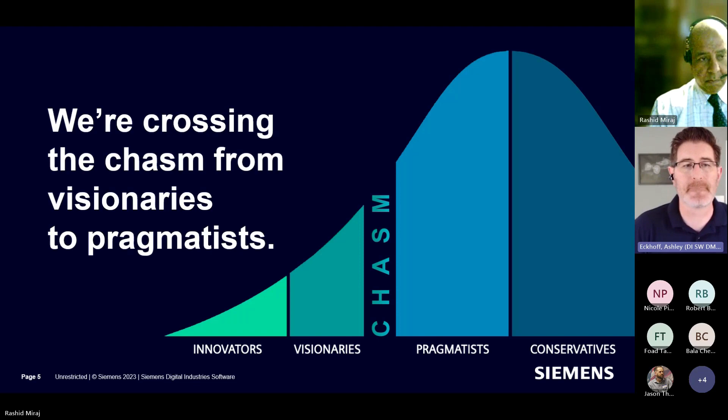So Siemens has worked hard to put together a comprehensive additive manufacturing approach that allows customers to address their challenges in both the virtual and physical worlds, from product design to production and even beyond, in very pragmatic ways. Just to review Siemens, Siemens has a ton of software solutions covering all the major acronyms: the EDA, the MOM, the MES, the PLM, the CAD, the CAM, the simulation. All of these products are basically concerned with taking an idea from the virtual world into the physical world in one way or another. And our additive manufacturing products are no different.

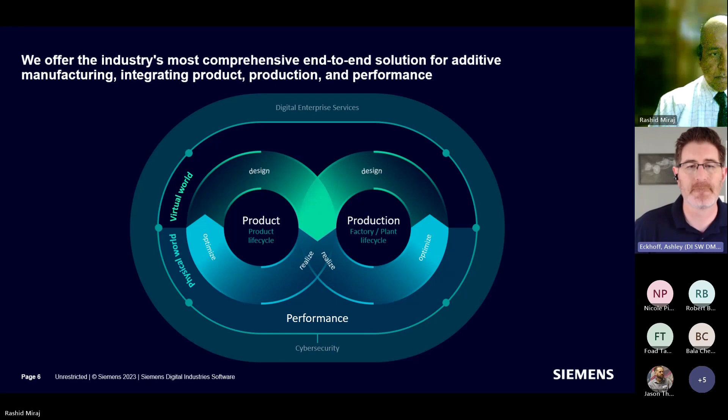So we do this through a seamless digital thread from the initial conception of a product and a design to the delivery of that part to the field. Now, this seamless digital thread allows for a tight, managed, traceable production workflow that then feeds into quality output in the physical world. Siemens has products across our portfolio that aid in this sort of order to production process.

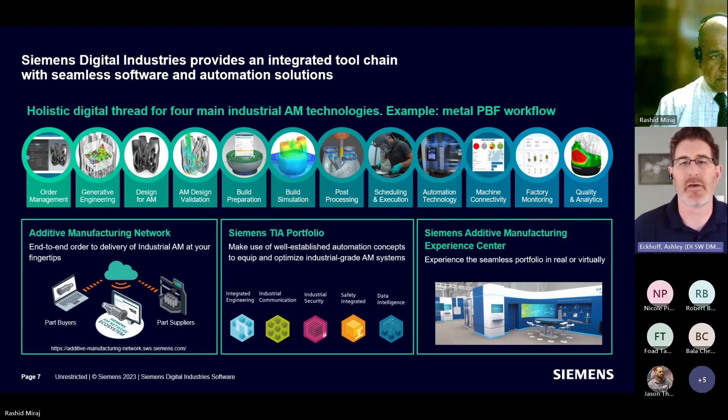If we look at this workflow in a bit more detail, you can see what we mean by seamlessly integrated across this value chain. Here you see the process for a part made with metal powder bed fusion, but the process is similar for other technologies as well.

Now, the beauty of this type of end-to-end solution is that there's no data translation, and the prerequisite sort of data cleanup between each step in the process kind of goes away. Furthermore, the entire process can be documented and traced every step along the way, and you can even begin to realize some other efficiencies from your product data moving smoothly between these steps.

So, for example, if your initial design goes through a design change or a revision that changes the geometry, that geometry can flow through the process down to other steps like build tray setup, where support structures can be automatically updated and regenerated as well.

So what you see here is only a subsection of the steps often necessary, but we try to offer our customers capabilities that are part of a holistic solution. We want our customers to be able to keep track of their versions of parts, the materials used, the tools required, the machines that are involved, and where that part is in their process from design to print.

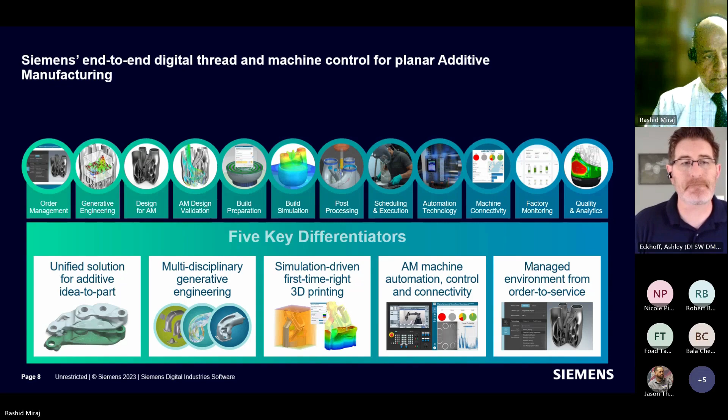Next slide, please. So I don't want to steal any fire from Dr. Miraj here at AlphaSTAR, but their solution for build simulation slots nicely into our end-to-end additive manufacturing workflow, allowing for our common customers to utilize their solution for polymer build simulation from within the Siemens solution set. This means that the data created for additive manufacturing process remains tightly managed, and you don't have some of those issues that we talked about from those various different point solutions throughout the process chain.

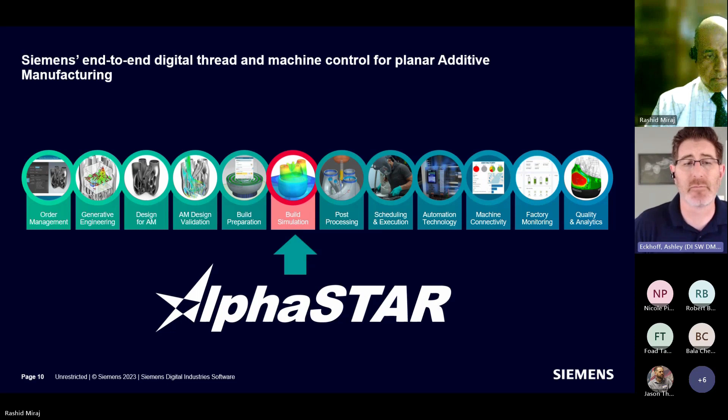Next slide, please. So at Siemens, the goal is to industrialize additive manufacturing for this new wave of pragmatic companies adopting the technology. We believe that getting the most from AM requires a complete end-to-end additive solution with design, simulation, production, data management, and process management software, all working in concert to enable that AM workflow.

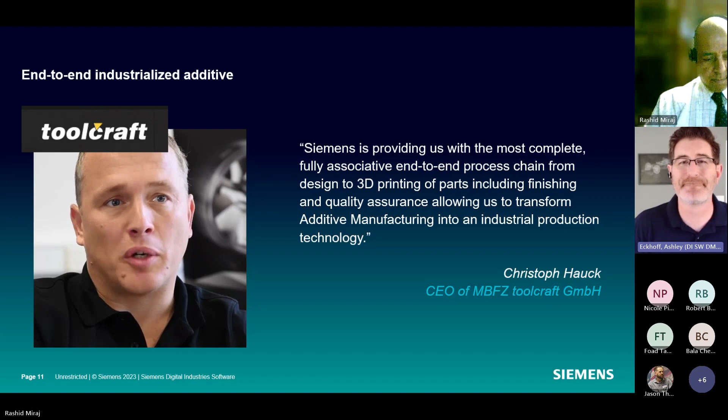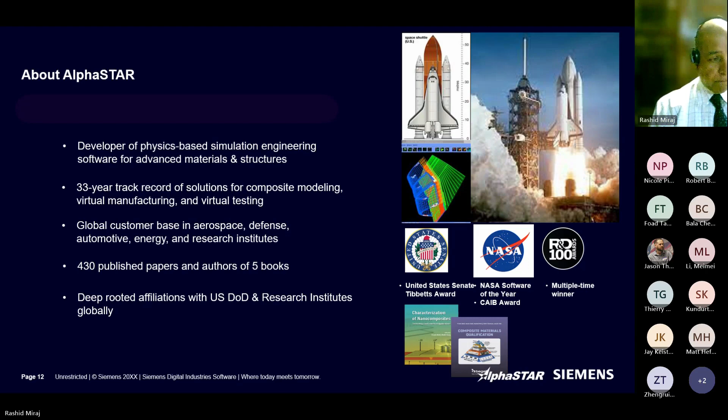We're grateful to be a part of the Siemens universe and carrying forward with that Marvel analogy, the powers of Siemens and AlphaSTAR are coming together for this particular opportunity. We understand that end-to-end solutions, the digital thread that really brings strength to the Siemens product line, is something we can take advantage of.

We recognize their solution, the power of the Simcenter 3D environment, and all of the tools that come along with that: the ability to develop exact meshing, slicing capabilities, and a solver that addresses both nonlinear thermal and nonlinear mechanical finite element analysis. Although the discussion today is on polymers, we know our friends at Siemens are also competent in the area of metal powder analysis, and hopefully we can grow into that direction with them in the future.

So what does AlphaSTAR bring to the table? Our expertise in multi-material, multi-scale modeling, deep physics on a multi-scale level to really understand mechanical properties, the defects and the effects of defects, both on the fabrication processing side and the as-built structure performance side. We've explored this space over the years in terms of AM as related to multiple 3D printing technologies: large format AM, big area additive manufacturing, FDM technology, SLS technology, and the plethora of acronyms that are out there.

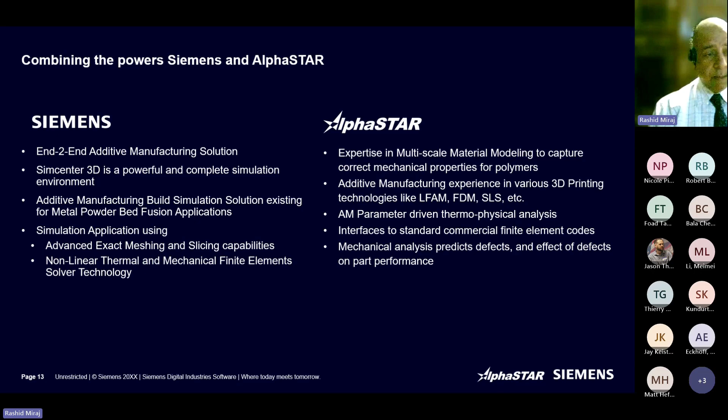While we're talking about, say, the NX Nastran platform of Siemens, in case there are other flavors of solvers, we have the ability to match up with those solvers as well. We predict not only defects and manufacturing anomalies that arise during a build, but also the effect of those defects on fabrication and on part performance. That's what we can bring to the table, feed back to our friends at Siemens, and make it part of that full end-to-end, from design to service capabilities that Siemens offers to its customer base.

And addressing interlayer delamination, whether from bead rotation or other causes, wrinkling, warpage, anisotropic behavior, residual stress, saturation, mechanical properties, fiber waviness, and agglomeration. Again, these can either be challenges we recognize or inputs, values put into the system to predict certain phenomena that may arise, as much information as possible, maximum data set, to really understand what's happening.

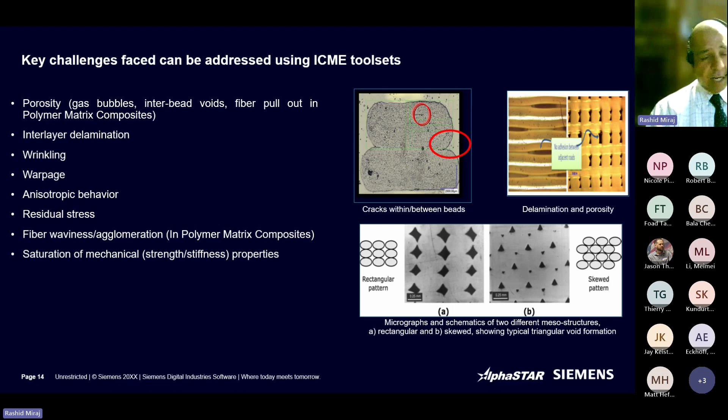In the AM process, looking at our role in the robust Siemens platform end-to-end digital thread capabilities, we take advantage of what Siemens can offer: detailed importing of CAD models, developing CAD models, creating structural meshes for that understanding, workflow, build plans, and the setup, whether it's the build tray, bottom plates, or tool paths. All of that information that is part of that build problem, build plan, we take on board and start using what we call our material modeling approach.

In the case of polymers, understanding the behavior of polymer systems at elevated temperatures, whether using short fibers, long fibers, continuous fibers, and other elements that come into play, how they impact the overall material system and material behavior. These are knowledge sets that we work with and analyze. And then what is the thermophysics of this? This might be considered just temperature distribution, when you have the build plan and you know what's going on, you have the G-code.

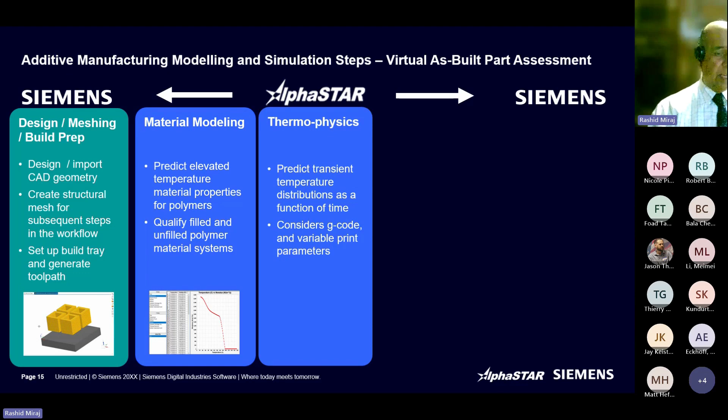In the case of a deposition process, you have a hot layer dropped on top of a cooler layer. There's a dynamic effect taking place, a transient dynamic effect. How is that? What is the temperature distribution? What are the gradients involved? How would that actually impact a build? And then also at the macro level, I know our friends at Siemens look at that as well, but here's a second set of eyes to look at the tool path and layout configurations and how that might impact not only a build, but the final net shape and quality of the built part.

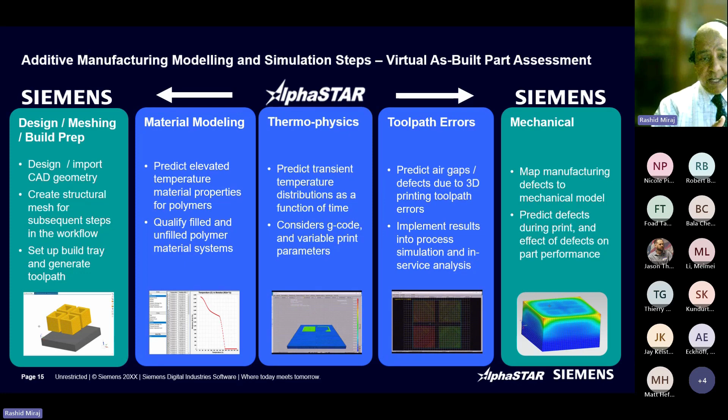All of this information, both data and analysis, is fed or mapped into a mesh and then goes back to the Siemens engine as a value add to finite element analysis, to make predictions of defects, anomalies, and their effects, whether it's final build quality, distortion, or shrinkage, as well as taking that virtual as-built part and subjecting it to in-service loading, in-service environments, and assessing part performance. It can be simply static loads, dynamic loads, fatigue, creep. The possibilities are there.

So let's look at these sections in a little bit more detail. I talked about micromechanics-based material modeling for polymers and composites, understanding what happens at room temperature and what happens at elevated temperatures. Depending on your parameter settings, are all the powders melting? Are they not melting? Depending on your process, are they coming out of the chamber in the state that you want?

Incorporating things such as cure kinetics to understand behavior, say in this case modulus, even beyond the glass transition temperature. Here we have an example of test data which kind of peters out right at the TG, but there is still some level of stiffness that can be predicted and captured. So again, how does that impact your build? How does that impact thermal distribution and the up and down temperature gradients? Understanding that gives us a full understanding of what's happening in the build cycle.

That also extends to elevated strengths, again using multi-factor techniques. We've had success undertaking this analysis and validating it against multiple common popular polymer material systems, whether it's Ultem 9085, 1010, PLA, ABS, or the nylons. The list is growing, and we're always expanding that data set. It's fully validated and available to the end user to incorporate into their design, having confidence that the predictions they're making are based on real validated tests.

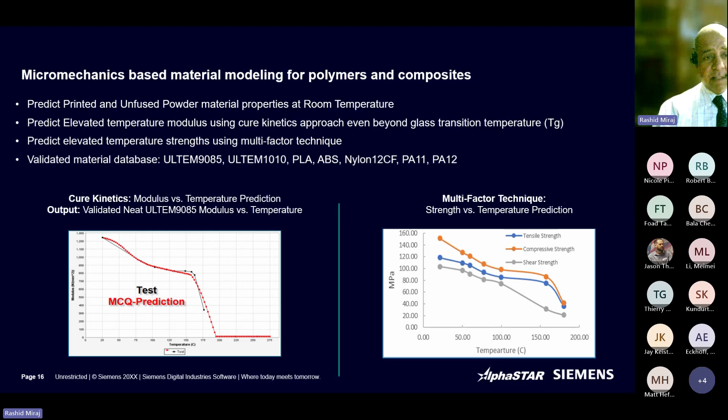Again, we talked about the other step: thermal distribution. Guided by machine parameters and build strategy, tool path and print parameter inputs, what's happening, what is the temperature distribution, whether for the entire build volume, incorporating the build plate and support structures, understanding transient temperature history, the hot and cold regions and cooling rates. All of that information ensures maximum resolution, not necessarily in finite element size, but in terms of what information is incorporated. So the power and speed settings, layer thickness, chamber temperature, dwell times, extrusions, bead width, laser spot size—whatever important variables there are is captured as much as possible to incorporate into the full understanding.

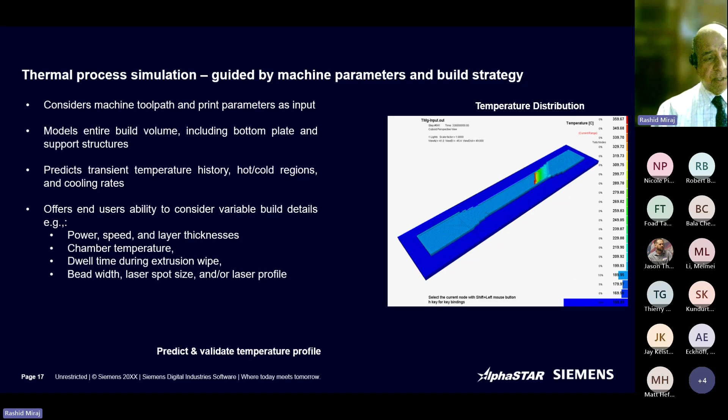So as I mentioned, with those three internal steps we have the big picture of the problem, so that when we send it to our friends at Siemens for the finite element solver, it's making the most exact calculations possible because we have a full picture of what's been going on. Also the macro-voids for toolpath quality, where those little gaps might come from the placement of the tool—you can see even here, little minor things that come up, but what's the impact of that? Is it going to distort the part, is it going to impact performance? That information is captured, remembered, and incorporated into the analysis.

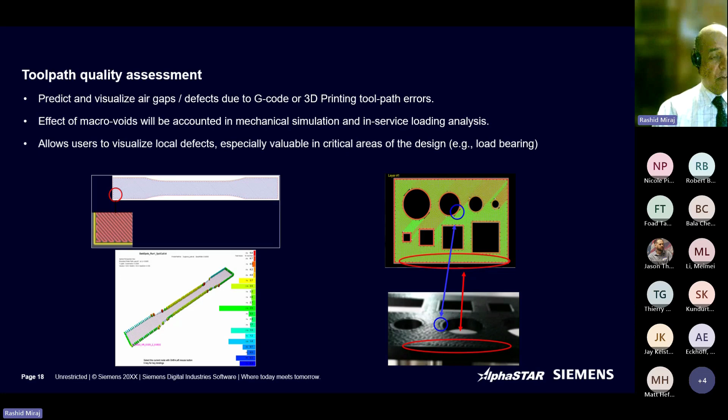So that when you go back to maintain or take full advantage of this end-to-end digital thread, you now have a way to identify the problem, virtually go back, tweak it, fix it, go through it again—bingo, now we've got a qualified part. Now we're on the right track without spending time on multiple builds. As they emphasized at Siemens, the key differentiator was build simulation for first-time-right fabrication. That's our role, that's our contribution to that overall Siemens approach.

And so the next step is that package is sent for thermomechanical analysis, thermal structural analysis, so we can see how we impacted the actual build itself, the layer-by-layer construction, what distortions are coming, predicting the defects that may arise, and predicting the effects of removing the base plate. All of those things come into the analysis so that we have a very detailed understanding of build quality and parameter-driven effects.

So now you may approach or pursue optimization methodology to say, what's the right combination of parameter settings, what's the right combination of material settings to get the build quality you want. And that is net shape, incorporating any problems that may arise, distortion, shrinkage as well.

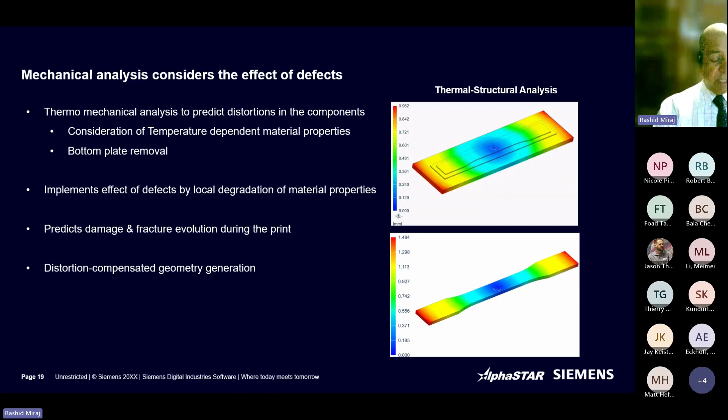Here you go. The idea of as-built part subjected to in-service loading, again, working with our Siemens partners to make those predictions on behavior. Is the part performing the way it was originally designed? Is it meeting spec? And it's because we've done all that work together to get you to the point that you can say, not only is it aesthetically correct, not only is it geometrically correct, it is performing the way we want it to.

Again, print it right the first time, and more importantly, print it right the first time so it works, and you don't have to do this all over again. Save time, save money, get to deliver the part in the most efficient and productive manner possible.

So we're doing full virtual predictions of build part performance, and this allows you—think about this for the engineer that's into trade studies, parametric studies—explore your material systems, explore your parameter settings, go crazy, everything done virtually. Allow yourself to look at all the possible variations. And again, you're accomplishing this virtually, so you're saving time, saving money.

Think about what this would have been if it had been all an experimental program. And have confidence that everything is an incremental approach. We validate constantly, and we would hope our end users would do that as well. Start with a simple specimen, dog bone, predict, validate, next step part, experimental test, validate, until you get to the point where you have that confidence and knowledge that the tool set is delivering analysis that gives you confidence in your designs.

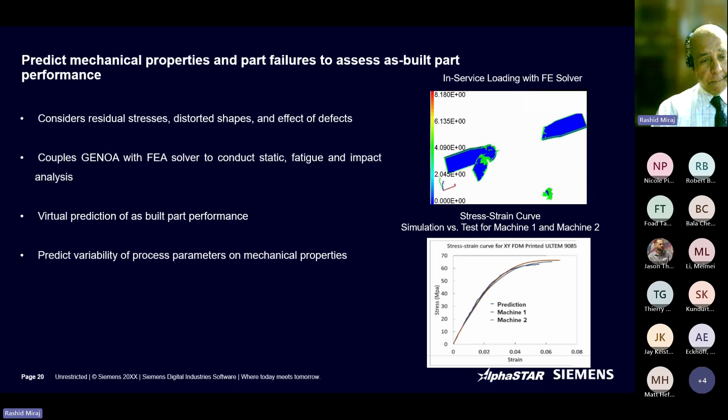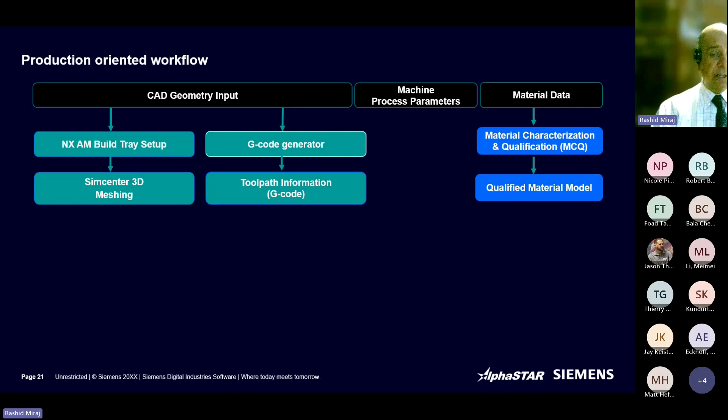So again, within the overall flow, working within the Simcenter design thread, we take full advantage of what our partners are giving us—not only the build tray setup, the G-code, the meshing, the toolpath, but also information related to material inputs, which allows us to do our analysis of the material system, the temperature properties, high temperature, low temperature impacts, qualify that material model to meet certain criteria, and then feed that all into our GENOA 3DP platform, which is seamlessly integrated into the Siemens workflow.

So that we can then not only do our thermal process simulation, thermal analysis, remember packaging this information so that we can map it onto a mesh, submit it to our NX Nastran, our friends at Siemens, their NX Nastran platform, or whatever solver you might have in mind, and use multi-scale progressive failure analysis to really recognize and see progressive failure, progressive damage evolution that might be within a print process, within a fabrication.

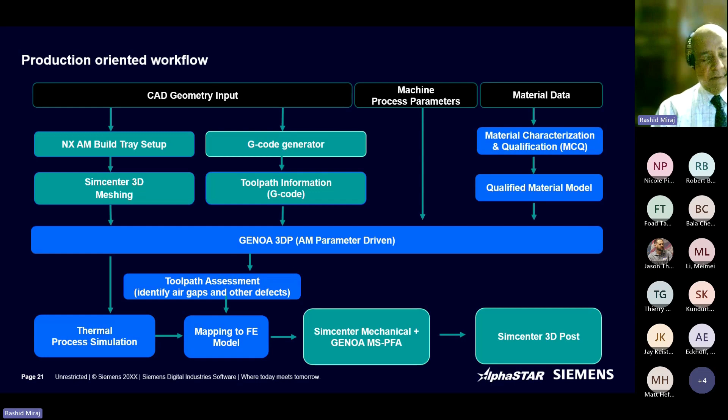And ultimately view it post-processing, again, through Simcenter. And this same logic can be applied to the as-built virtual part to see once it's subjected to service loads, see how does it perform, and visualize that, again, through Simcenter.

So here are a couple of examples some friends in the industry have played with, looking at the Stratasys system using the Ultem 9085 material system. In this case, everything you're asking for—what we're predicting, deformations of the part before it's fabricated, understanding the temperature criteria, the elevated temperature behavior, cure kinetics—being able to simulate the process, the thermal processes that go into play. And so undertaking the thermal structural analysis to see what would be the impact on build quality.

And in this particular case, the tool set was able to identify, with the help of the solver, that if you build it this way, there's going to be unexpected waviness in these little cross sections. And it turns out that's exactly what happened when they built this part. This is the more improved part when we went back and updated the parameters.

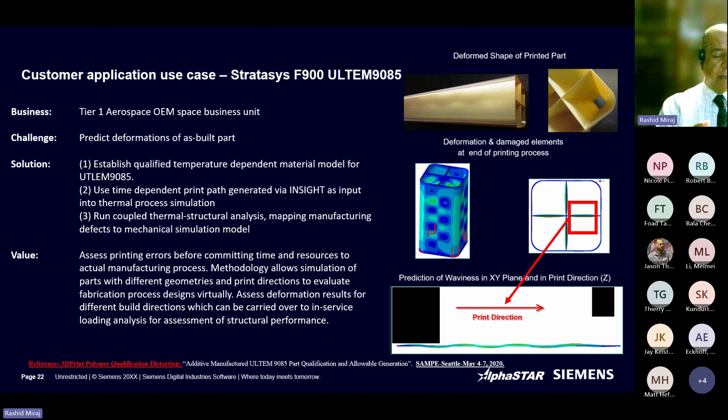But again, the idea is, can you virtually see it and qualify the part? And what I mean by qualify is recognize the defects that are arising, recognize the effect of defects that are arising, and then go back using a strategy to come up with the ideal parameter settings, the ideal support structures, so that you eliminate the problems, so that when you build it, you build it right the first time.

Here's a case of a large format AM activity with Oak Ridge National Laboratories. They're public, so I can give their name. In this case, they were just building a large polymer wall, reinforced short fiber reinforced polymer wall. And again, we were able to look at the thermal behavior, thermal structural analysis with the tool systems, and come back and predict where were there anomalies, where were there problems.

In the case of large format fabrication, you particularly would benefit from this virtual approach because, building a 6-foot by 10-foot wall and wasting all that material, somebody's got a lot of splaining to do if they get it wrong. Fortunately, they were able to catch any problems they might have ahead of time and use the tool set to catch those and correct them virtually before they actually did the fabrication. So again, reducing trial and error, improving design cycle, accelerating production times.

All of this capability will be now available to the Simcenter end users, since we're part of the team and complementing Siemens with our polymer solutions, our value add to the Siemens platform.

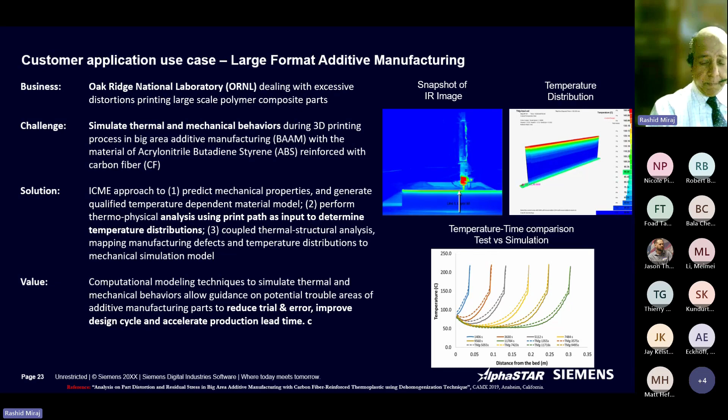Again, a fast combination of tools to allow you to visualize not only product quality, but product performance, and to help you save time, save money.

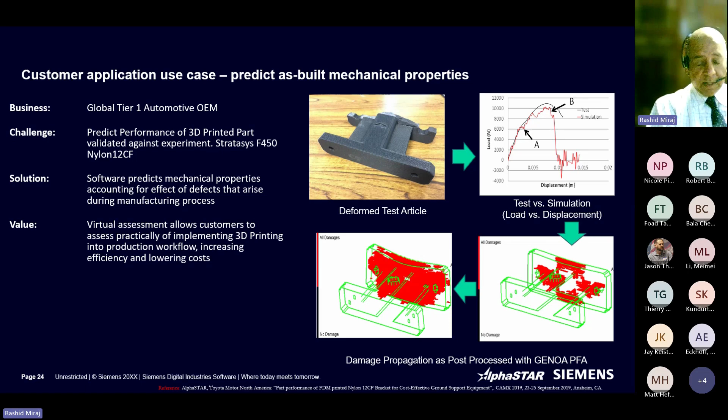So how are we leveraging everything that we bring to the table with Siemens? Well, we're hopefully improving build quality for your print. So understanding the impact of materials, print orientation, print parameters on build quality. Siemens does a lot of that beforehand, and think about it as a second eye to help out to ensure the quality of the finished part.

Capturing the as-built mechanical properties, very important, the defects and the effects of defects. So when you're actually looking at part performance, you're understanding why something might have failed, what went wrong, because that knowledge, that information is part of the digital thread, part of the digital information that you have to work with your designs.

And then not only that, but guidance on material selections, to not only qualify material systems, but explore parametric studies, trade studies. What would other systems apply? Where would other concepts come into play, and how would they impact the overall part quality, part performance, and its serviceability?

And then, the other thing too is on the print path, evaluating the print path, catching any problems that might arise to the print path, and how that might impact net shape. And if it does, how would that ultimately reduce performance? Is there material at a critical area that's not present that was going to impact the performance?

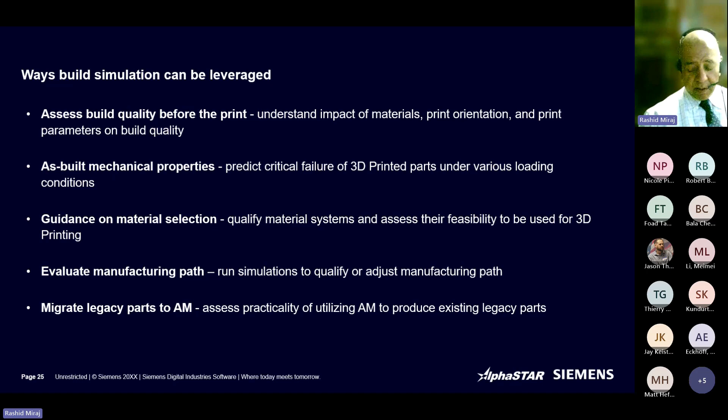Remember, you're looking at this virtually so that you can see in the virtual as-built part, how does it behave, how does it perform? So that little additional information plays a long-term role in understanding the overall performance of the part.

Thank you for your time, and I guess I'll pivot back to Jason.